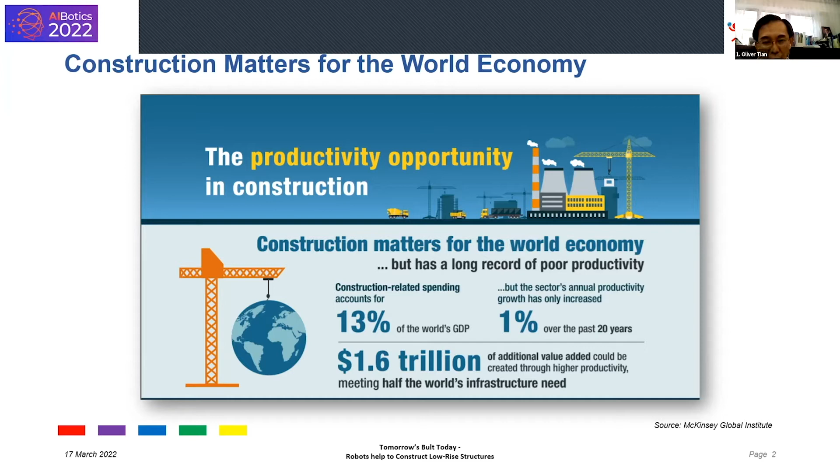At the same time, we are also seeing the need to reinvent construction. We need to do so to achieve a route to higher productivity. Now, to do so, McKinsey has suggested that we need to focus on a few areas, a few root causes, which are contributing to the low productivity in construction, classified into three categories: external forces, industry dynamics, and firm-level operational factors.

Now, for each of these particular areas, McKinsey has actually identified that there's a need to look at how projects, as they become increasingly more complex, need to be maximized, optimized, and managed effectively. And there's really a need to look beyond just the site project management, but look at the end-to-end integration of processes across the entire construction cycle. Regulations, labor skills, technology augmentation are all very important to be able to achieve this.

Now, construction can be quite opaque and sometimes quite highly fragmented. And this is where a very intensive integrated view of how construction projects can be managed becomes extremely important. Contractual structures and incentives must be aligned in order to achieve many of these objectives, and more importantly, raise productivity.

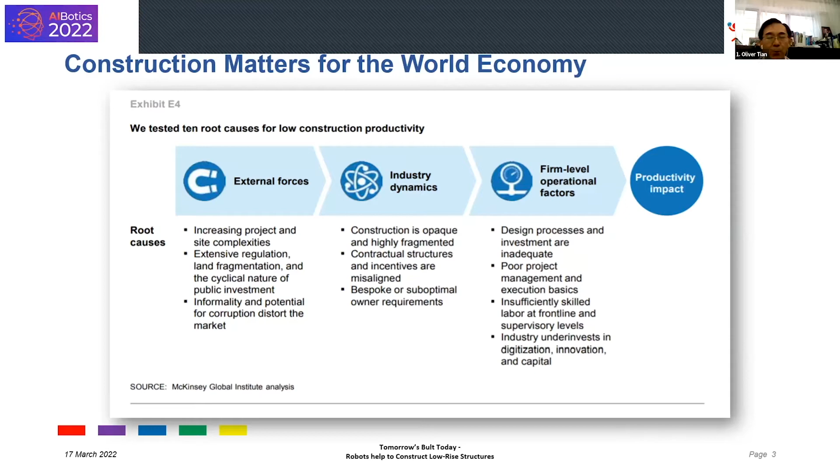There are a number of areas that McKinsey believe we can boost higher productivity. And these are classified into the need to look at regulatory guidelines, the need to rewire and reshape some of the contracts that take place. Very importantly, the design. The overall design of a construction project needs to be looked at from head to toe, and the whole building information management system must be able to provide the right oversight for project managers.

Procurement and supply chain has to be integrated, and there is room to fill in the gaps to achieve higher productivity. On-site execution, construction being a sector where the environment for automation may not be as easy due to the unfriendly geography and status. Somewhere, somehow, we need to infuse technology and greater innovation into the construction sector. Reskilling also becomes a very important factor to consider when we look at how we can improve productivity in construction.

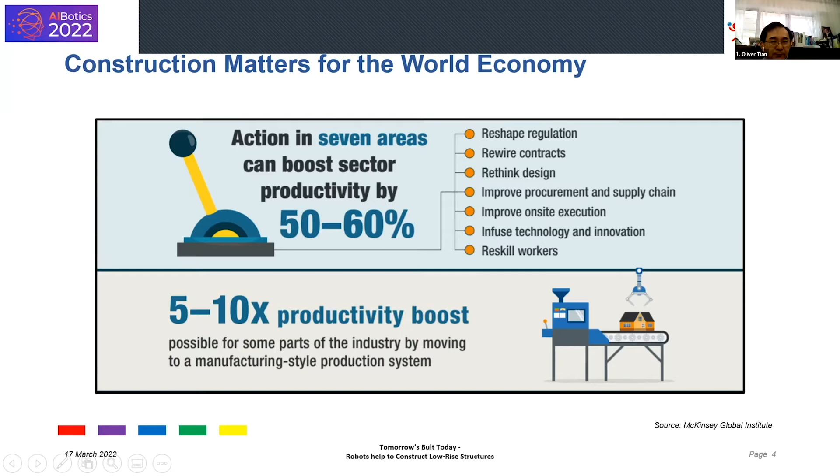In this blog write-up, just last month, barely 5 weeks ago, the writer Eileen Brown suggests that AI will take construction robotics from hype to reality. It is time that we believe AI and robotics can play a major role, and explore how this can be achieved. I think project managers should start optimizing how this can be done.

I'd like to, at this moment, play a little soundbite from the Asian Robotics Review that talks about the promises of robotics in construction, particularly starting from 2022. So hang in there. I'm going to play the soundbite right now.

Hooray for construction robotics. It seems to be on the rise for 2022.

Oh, the noise from a construction site. We've all suffered through the annoying din. But construction is not only noisy and a traffic nightmare, but it's also inefficient, woefully expensive, and dangerous. Thankfully, construction is now getting serious attention from automation and robotics, and 2022 might be a breakout year.

According to McKinsey's infrastructure report and ABI Research, annually $10 trillion in construction-related spending goes on globally, which is the equivalent of 13% of world GDP. The sector employs 7% of the world's working population, where 20,000 annually are injured. Safety or lack thereof puts construction right up there with mining, fishing, logging as the most dangerous professions.

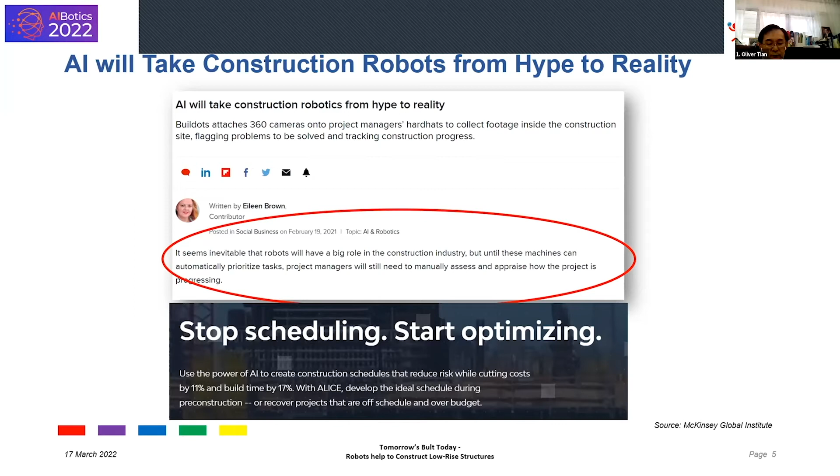Agriculture and manufacturing have increased productivity 10 to 15 times since the 1950s. The productivity of construction remains stuck at the same level as 80 years ago. Current measurements find that there has been a consistent decline in the industry's productivity since the late 1960s. Disruption of the construction industry via robotics and automation could increase the construction industry's value by $1.6 trillion a year, which is like boosting global GDP by 2% a year.

ABI Research is out with a headline that says it all. It blares out, "Construction, the next frontier of robotics adoption, thanks to advances in automation technology." For 2022, construction is now getting serious attention from automation and robotics. The Finnish innovation agent, Aarni Heiskanen, is out with the world's best construction robotics list for 2022. You got to download this and eyeball it. He lists 53 together with the URLs for individual websites. So according to the list, there's 53 companies worldwide that could have a breakout this year, 2022.

For the future, we may not be getting less of this, but it may just happen over a shorter period of time. Best of luck for construction robotics in 2022.

There you have it, everyone. Mr. Tom Green, Editor-in-Chief, Asian Robotics Review. Now, he has done quite a number of reviews on different applications of robotics in different sectors. And this was just a soundbite that I picked up from him with courtesy from his publication to share with you some of his findings in the use of construction robots and the implications, the possible upside of using robots in the construction industry.

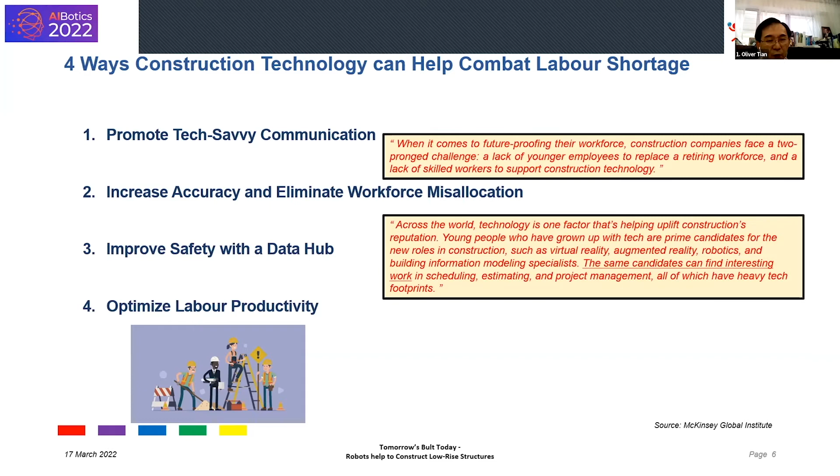Now, there are probably a number of ways we need to look at in terms of how construction technology can help to combat the labor shortage, right? And here are some of the views that have been shared by various people, right? Tech-savvy communication, efficiency and ability to look at workforce management, safety management, as well as optimizing the productivity of the labor force. There are many ideas and there is much potential that we look to explore in how technology can support this particular space.

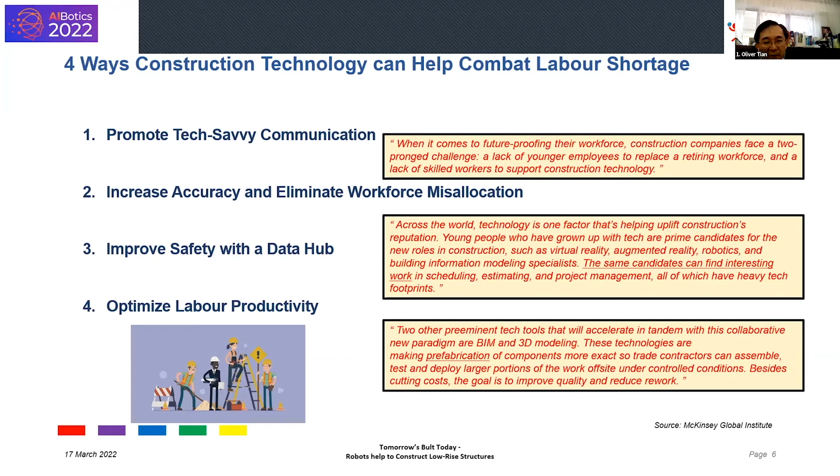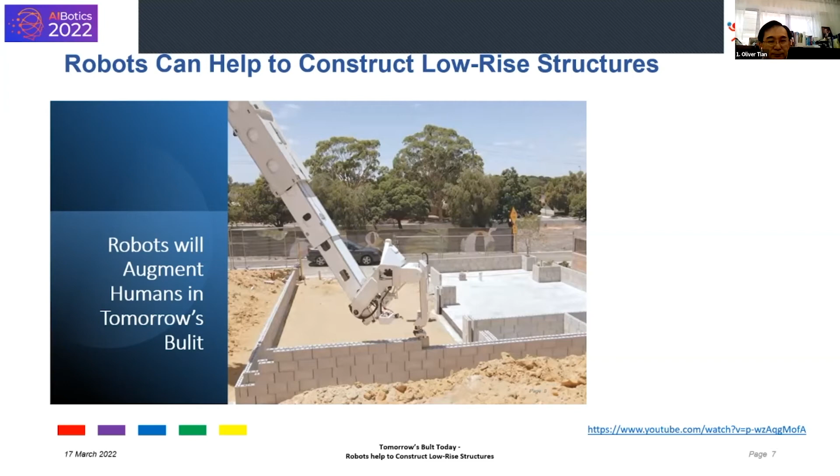Well, then the fear comes about: will robots take over the construction job? Well, let's be assured, not anytime soon, right? Various reviews have seen that robotic technology will play a major role to augment humans in tomorrow's build. Rest assured that in order to employ the younger generation into the construction sector, technology will play a part to enable, to motivate the interest, to create the opportunity for the younger generation to join the workforce.

So with that, I end my presentation, but I will show you a quick video right now on how robots can play a major role in building low-rise structures. So let me end from here.

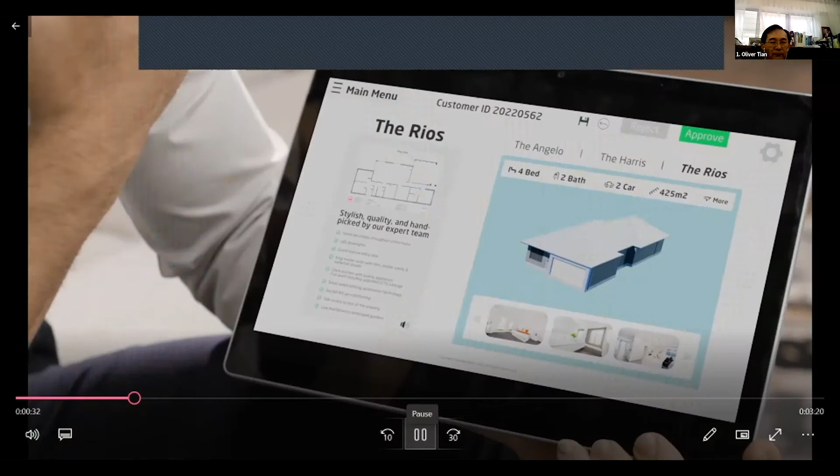FBR is revolutionizing the residential construction process like never before. As soon as a home buyer steps foot in a builder center, they will be able to select from high-quality, modern architectural house designs specifically optimized for the Hadrian X construction robot, with a focus on delivering speed, accuracy, safety, and waste reduction throughout the construction process. Got a design idea of your own?

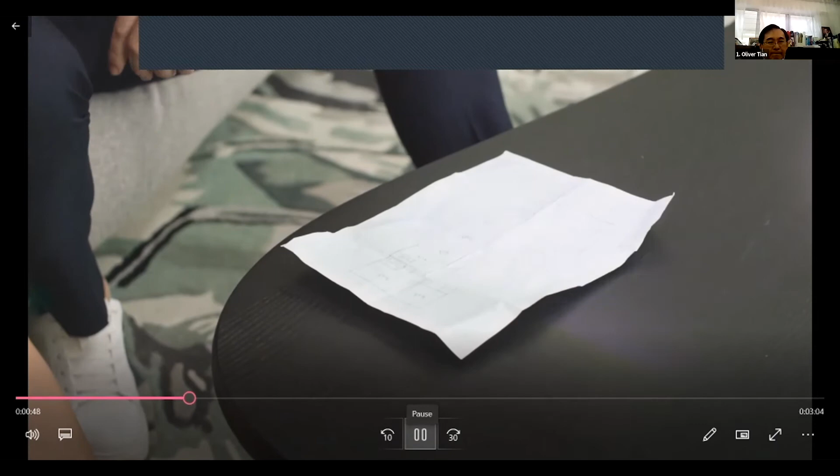FBR's unique architectural design software, known as TAD, can transform any wall sketch into optimized block information that the Hadrian X construction robot can lay, intuitively accounting for the building codes of whatever jurisdiction a home is constructed in. Once the final plans and contract are signed off on, the real magic behind FBR's technology begins. The TAD software is able to produce a detailed 3D CAD model, forming the basis from which the Hadrian X construction robot builds. It also provides a complete bill of materials, accounting for every brick and saving offcuts to be used later on in the build.

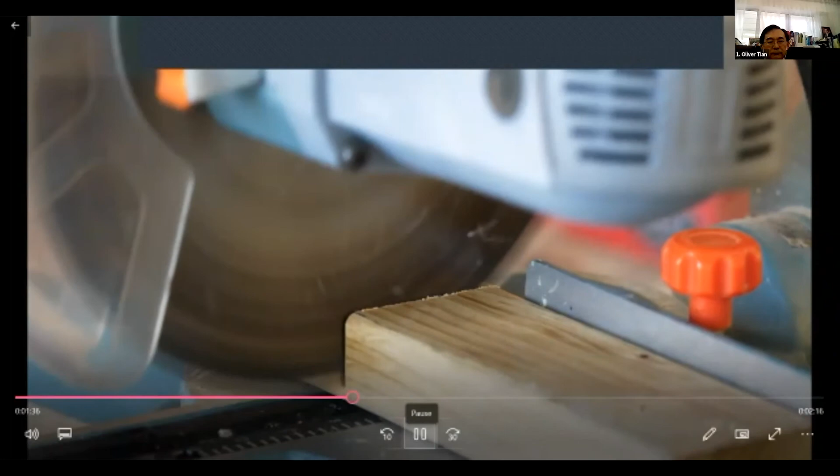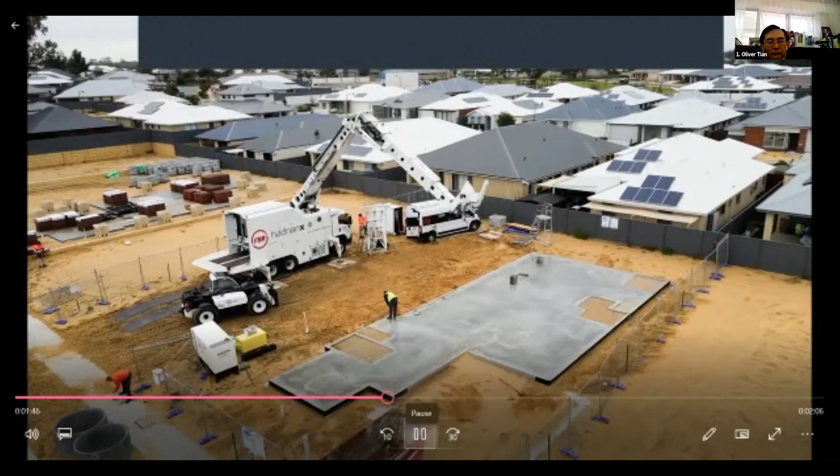This highly accurate source of data enables following trades to pre-order or prefabricate items such as roof trusses and window frames, enabling swift installation once the bricklaying has been completed. As the Hadrian X construction robot arrives on site, it surveys data points on the slab to ensure it perfectly matches the 3D model, and then commences the construction process. The Hadrian X is loaded with pallets of blocks through the use of an ancillary vehicle.

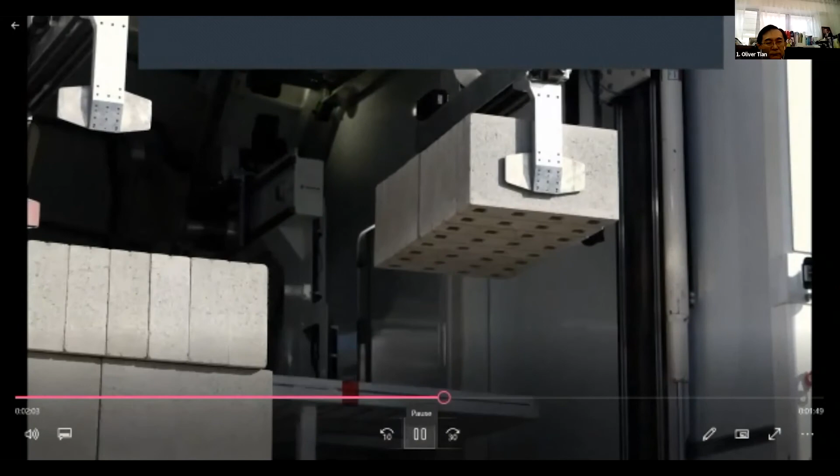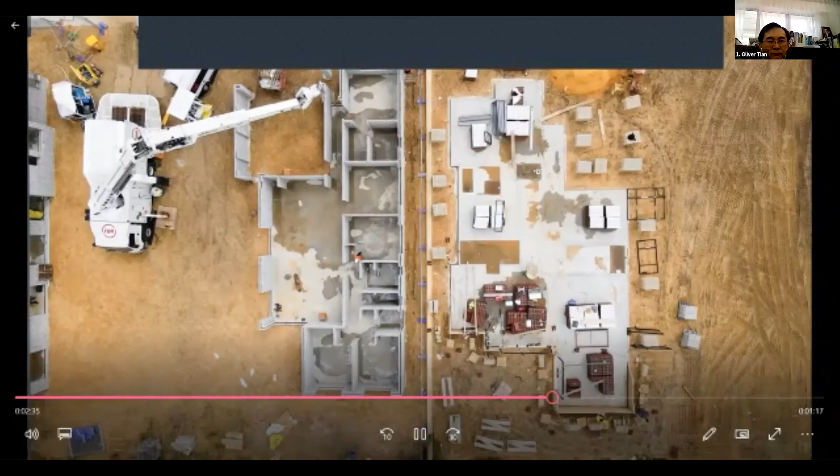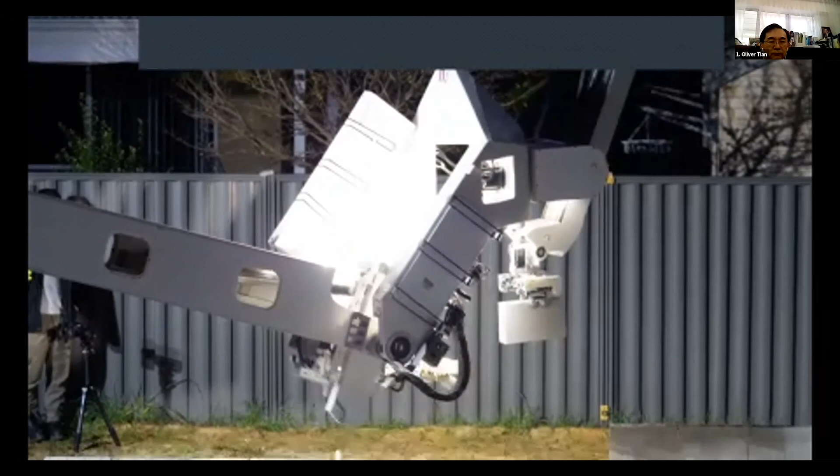These blocks are automatically unpacked by de-hacking robots, cut to size using an internal saw, if necessary, and transported through a telescopic boom with a reach of up to 30 meters. Upon delivery to the layhead, each block is applied with construction adhesive, which bonds twice as strong as traditional mortar, and then laid with precision. A typical 4-bedroom, 2-bathroom home can currently be constructed by the Hadrian X in just over 24 hours. In FBR's home of Western Australia, building operations are only allowed to commence between 7 a.m. to 7 p.m. Monday to Saturday. But 24-hour construction is possible in other jurisdictions around the world.

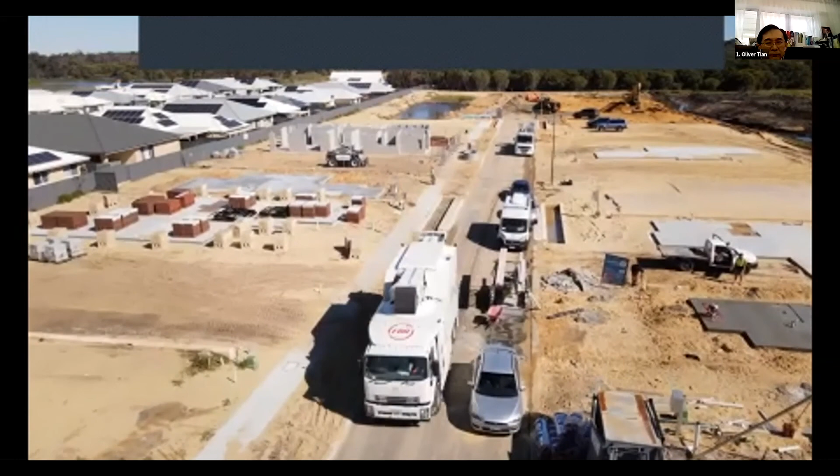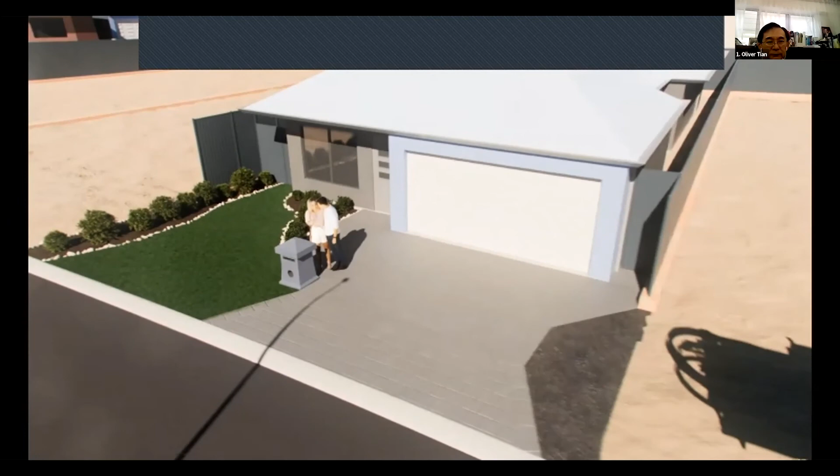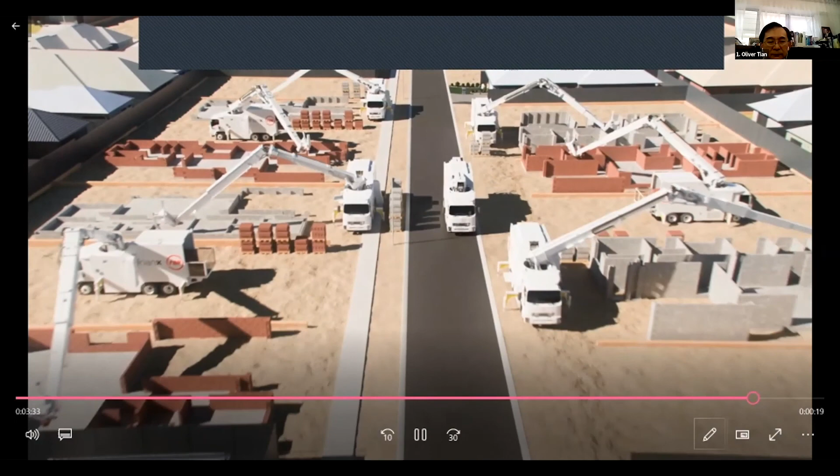Once the bricklaying component is completed to exact specifications, following trades arrive to continue the construction process. The Hadrian X construction robot builds with such accuracy that it results in significant cost and time-saving benefits to the builder and, as a knock-on effect, to the homeowner. With this new home reaching lockup and the keys handed over to the owners, the Hadrian X construction robot can now proceed to its next residential construction assignment. FBR, Innovation in the Making.

So there you have it. A very interesting project set in reality where robots can play a major role not to displace the human capability, but to augment what the humans can do and enhance upon our potential at the same time. What is really possible as we move forward is that the role AI and robotics will play in the construction sector will immediately contribute to a major productivity in the sector.

Of course, there are possibly a number of challenges that we need to overcome, one of which could be the mindset of project managers and engineers, and secondly, probably in the area of labor reskilling. Let's talk more about this together with other speakers.